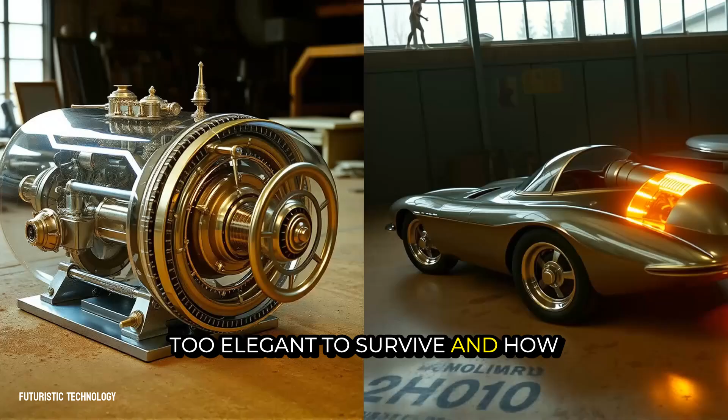We will investigate why a nearly silent engine from the 1800s was too elegant to survive, and how a jet-powered family car from the 1960s became a forgotten dream. This is more than a history lesson. It is a recovery of forgotten futures.

What forgotten idea from the past do you think could change our future the most?

The world we live in runs on a single, dominant idea of power. It is a world of pistons pumping, cylinders firing, and fuel burning in a cycle so universal we rarely stop to question it. But before this single vision solidified, the landscape of mechanical invention was a spectacular chaos of possibility. This was the dawn of difference, a time when what constituted an engine was still up for debate.

Non-traditional propulsion is not just a different way to build a motor, it is a fundamentally different way of seeing energy itself. These are machines that step completely outside the paradigm of the internal combustion engine, rejecting the very principles of pistons and controlled explosions that we take for granted. They are the roads not taken, the answers to questions we have forgotten how to ask.

Consider an engine that has no moving parts at all, humming silently as it turns heat directly into electricity. Picture a device powered by nothing more than the temperature difference between a warm cup of coffee and the cool air of the room. Some even ventured into realms that sound like science fiction, exploring how collapsing bubbles of light or the subtle pressures of empty space could be harnessed for work.

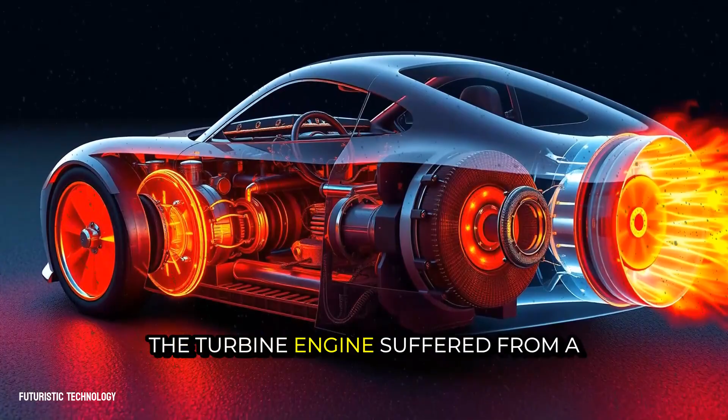But this beautiful dream had concrete problems. The turbine engine suffered from a noticeable throttle lag, a dangerous delay between pressing the accelerator and the car actually surging forward, a major flaw in busy traffic. It was also notoriously thirsty at low speeds and idle, gulping down fuel while sitting at a stoplight.

Its most dramatic flaw, however, was the heat. The exhaust gases shot out at temperatures so incredibly high they were known to discolor and even melt the asphalt on the street behind it.

Chrysler's breathtaking gamble proved that the technology worked, but it also revealed a harsh truth. The gas turbine was a creature of the open highway, born for constant, high-speed flight. It was fundamentally ill-suited to the stop-and-go reality of daily commuting. The future it promised was one of simplicity and smoothness, but it was a future that demanded we change our driving behavior and our entire infrastructure, a price the world was not ready to pay.

This was not a failure of engineering, but a collision between a brilliant machine and the inconvenient realities of human life. That distinct, terrifying buzz was the sound of pure physics weaponized. During the Second World War, the German V-1 flying bomb, or doodlebug, introduced the world to the pulse jet engine, a device of terrifying simplicity.

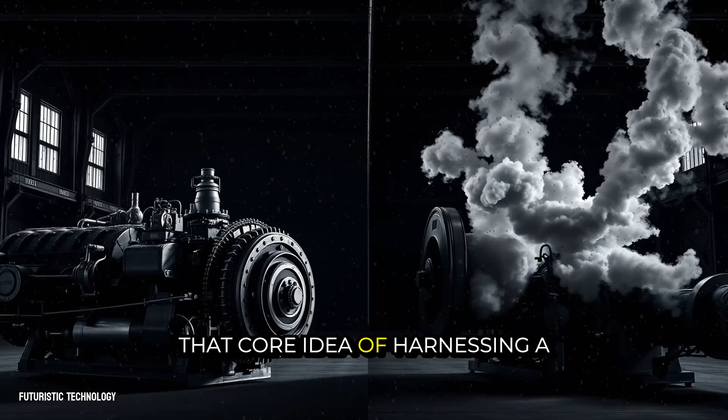But its ghost never left us. That core idea of harnessing a vacuum, of making power from emptiness, echoes through time. It is the same principle that allows a simple drinking straw to function, and it reappears in the most advanced scientific instruments. The atmospheric engine's legacy is a philosophical one, a reminder that sometimes the most powerful force is not what we add, but what we take away.

Fire could become the piston itself. This was the breathtaking promise of the orbital combustion process engine, a design that discarded solid metal parts in favor of a self-contained ring of flame. Picture a donut-shaped cylinder, a continuous circular chamber with no beginning and no end. Instead of a metal slug moving up and down, this engine injected a precise mixture of fuel and air, then ignited it to create a single, rotating fireball. This burning vortex became the piston, a toroidal wave of pressure that spun around the chamber, compressing the fresh charge ahead of it and pushing the exhaust out behind.

It was an engine built from pure energy, a concept that promised to burn fuel so completely and so lean that emissions would plummet and efficiency would soar. By controlling the very propagation of the flame itself, the orbital combustion process aimed to solve the core inefficiencies that had plagued internal combustion for a century.

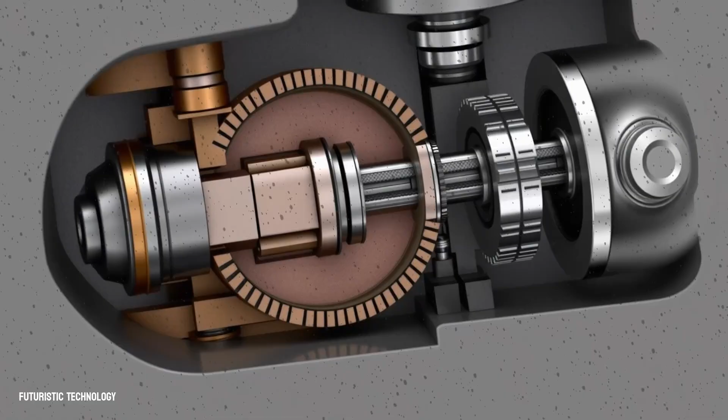This forgotten path represents the ultimate dream of direct energy conversion, a machine that is all heart and no body. It remains a tantalizing vision of pure physics harnessed for work, a silent engine that we could see but never quite hold. That promise of a perfect, vibrationless engine found its most passionate champion in the 1920s.

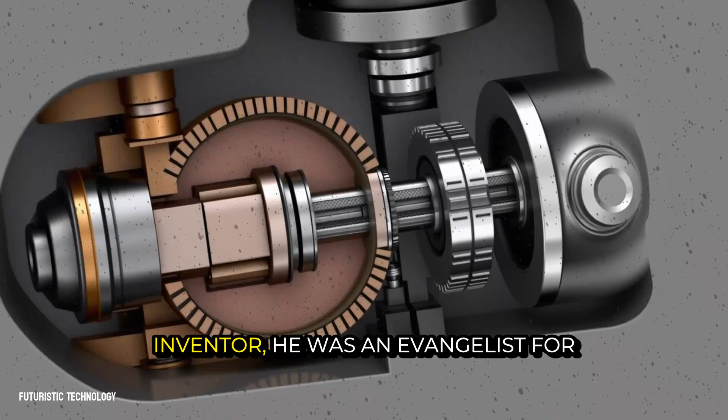Russell Bourke was not just an inventor, he was an evangelist for a mechanical revelation. His engine was a declaration of war against complexity itself. It tore up the conventional engine blueprint and started over with an almost philosophical purity.

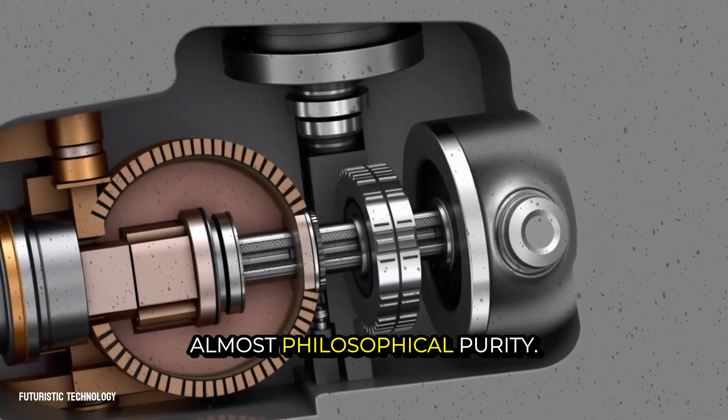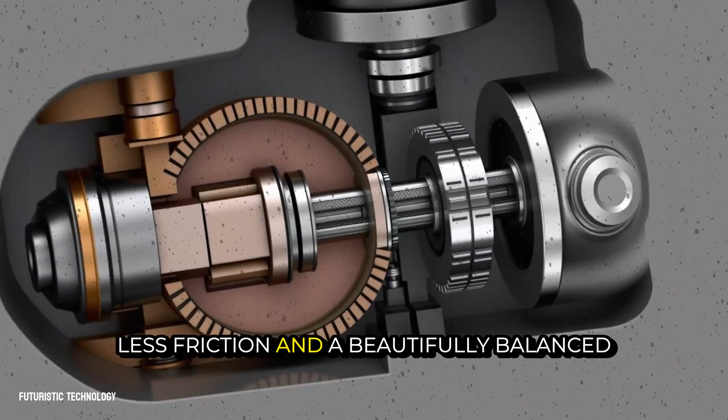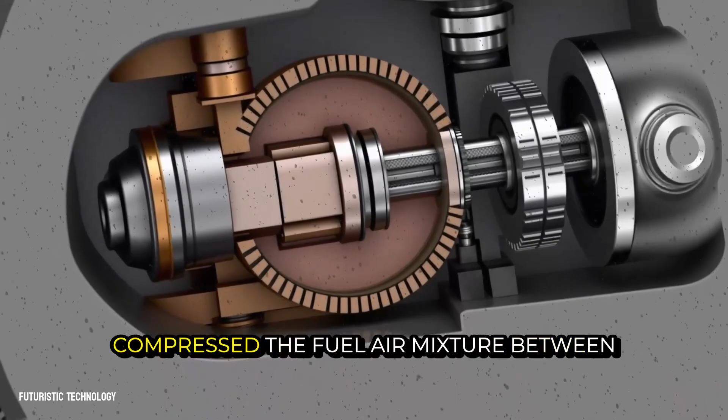At its heart was the Scotch yoke, a mechanism that replaced the familiar connecting rod and crankshaft. This elegant swap converted the piston's linear motion into rotation with far less friction and a beautifully balanced sinusoidal movement. The design used two pistons opposed in a single cylinder, their heads facing each other across a shared combustion chamber. As they moved inward together, they compressed the fuel-air mixture between them. Upon ignition, the explosion forced them apart, their motion captured by the Scotch yoke to spin the crankshaft.

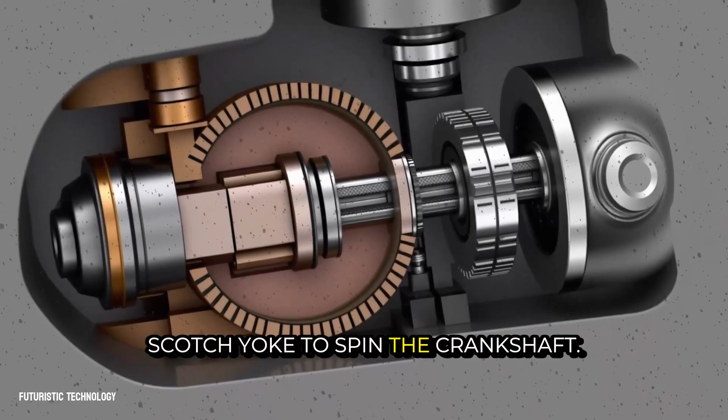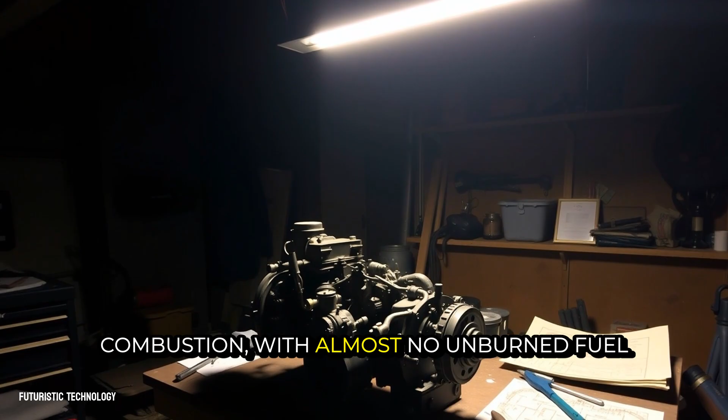This two-stroke, opposed piston design promised a mechanical symphony. Its proponents swore it ran with an otherworldly smoothness, producing virtually no vibration. They claimed its efficient scavenging of exhaust gases led to astoundingly clean combustion, with almost no unburned fuel to pollute the air. Most tantalizing of all was its reported fuel flexibility, able to run happily on gasoline, diesel, kerosene, or even alcohol with minimal adjustment. It sounded less like an engine and more like a mechanical utopia.

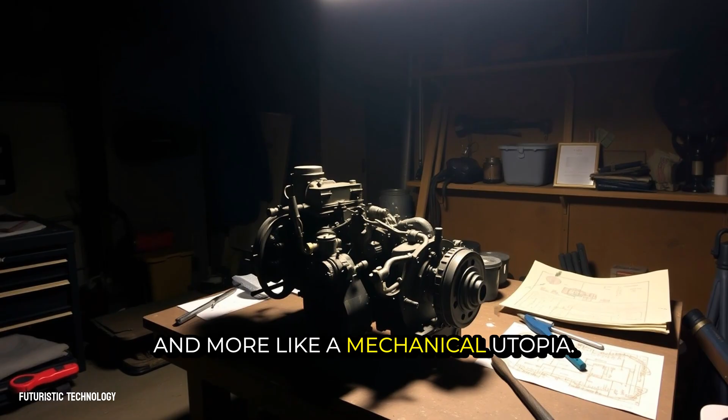So what happened to this miracle? The story immediately plunges into shadow. The secret history of the Bourke engine is a battleground of competing narratives. One persistent legend claims the design was deliberately suppressed. The story goes that major oil and automotive corporations, threatened by an engine that promised incredible fuel economy and could run on virtually anything, acquired the patents only to bury them forever, protecting their lucrative empires. It is a compelling tale of David versus Goliath, of a brilliant outsider crushed by corporate greed.

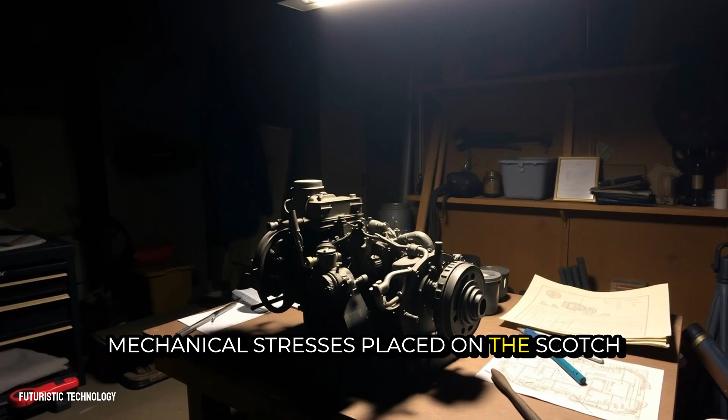Yet another, more sobering analysis points not to conspiracy, but to the engine's own internal demons. Critics and engineers who have studied the design point to the immense mechanical stresses placed on the Scotch yoke components. The very simplicity of the system may have created points of extreme pressure, leading to potential failures under continuous high load. The scavenging process, while elegant in theory, might have been difficult to perfect in practice, leading to inconsistencies.

Was the Bourke engine a flawless masterpiece murdered in its crib? Or was it a beautifully flawed concept that could never quite live up to its own breathtaking promises? The truth is likely lost to time, a murky blend of both.

The Bourke engine survives today not on our roads but as a cult legend. It is a ghost that haunts the garages and workshops of amateur engineers and dreamers who continue to build and test their own versions, chasing that phantom of perfection.

Its story is a cautionary tale about the fine line between visionary genius and impractical obsession. It forces us to ask a difficult question. When a revolutionary idea fails, is it because the world was not ready, or because the idea itself was just a beautiful, unworkable dream? Starlight itself can push a spacecraft.

This is the radical promise of the solar thermal rocket, a design that treats the sun as its only fuel tank. Forget burning chemicals or splitting atoms. This engine runs on pure, concentrated sunlight.

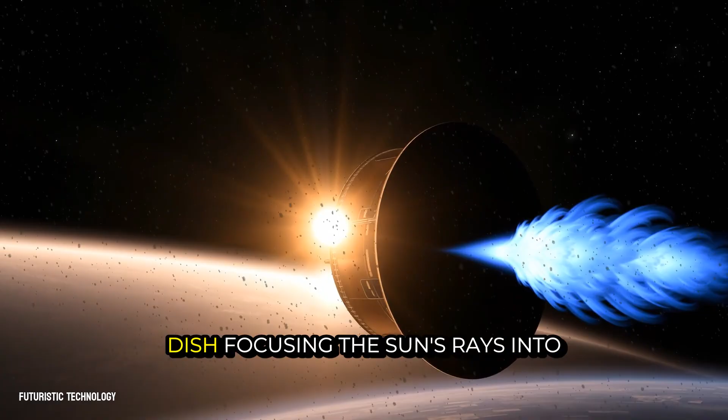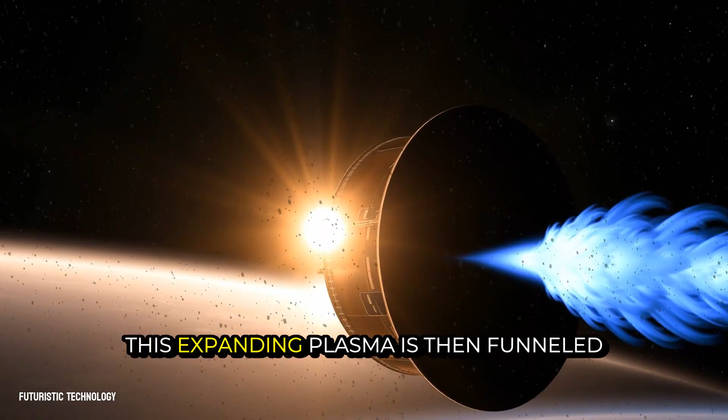Imagine a giant mirror, a parabolic dish focusing the sun's rays into an intense point of heat inside a chamber. Liquid hydrogen, colder than the void of space, is pumped through this solar furnace. In an instant, it is heated not by a flame, but by light, transforming into a superheated gas screaming for release. This expanding plasma is then funneled through a traditional rocket nozzle, creating thrust with an elegant simplicity that chemical rockets cannot match.

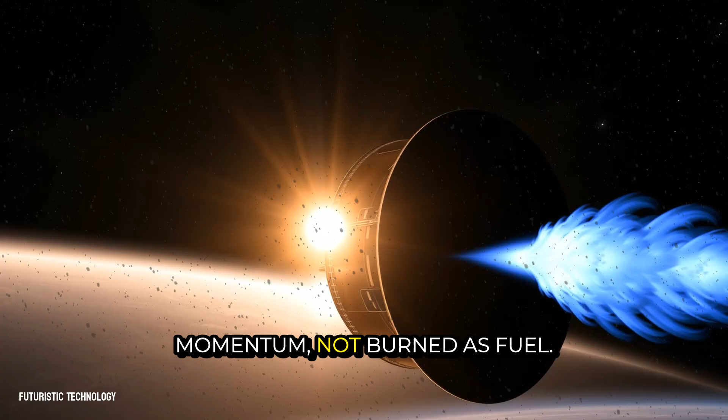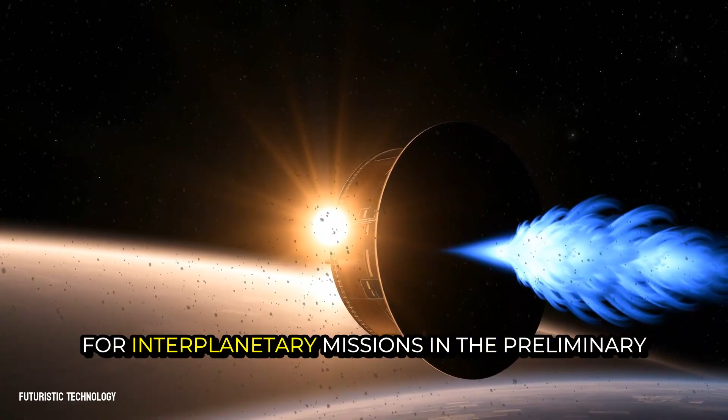The efficiency is staggering because every bit of propellant is used for momentum, not burned as fuel. It is a silent, clean, and potentially endless engine for sailing between worlds. Its blueprints were drawn in the 1970s and 80s, a serious contender for interplanetary missions in the preliminary studies of NASA and other space agencies.

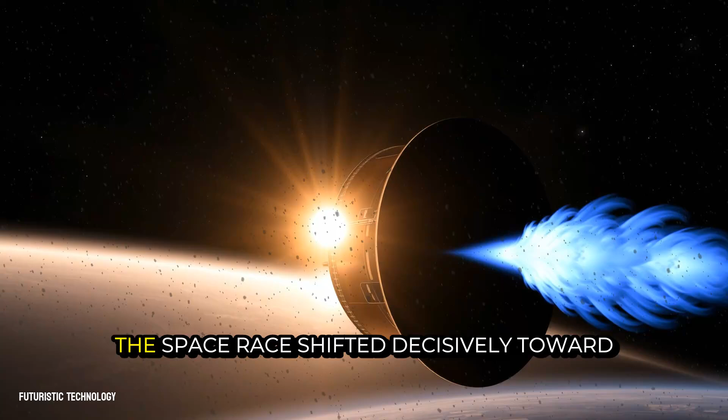It was the logical next step, a sustainable path to the stars, but that future was sidetracked. The political and engineering focus of the space race shifted decisively toward the raw power of chemical rockets and the dense energy of nuclear thermal propulsion.

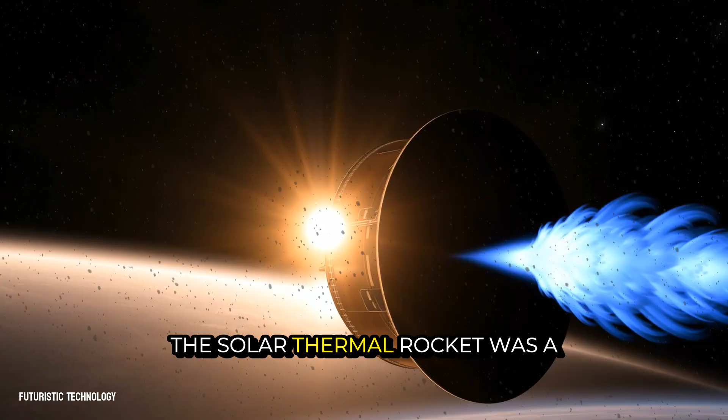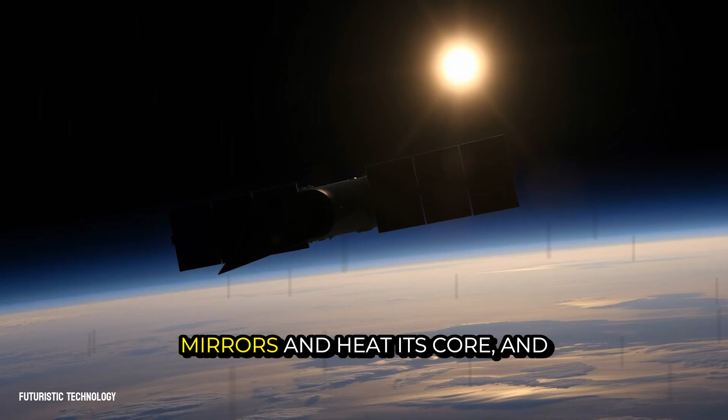The solar thermal rocket was a gentle sailboat in an era that prioritized explosive speed. It was deemed too slow to start, requiring time to position its mirrors and heat its core, and its power was intrinsically linked to its distance from the Sun, weakening as it traveled to the outer planets. So the concept was filed away, a beautiful solution waiting for a problem we had not yet fully embraced.

It stands as a monument to a different kind of space age, one not of explosive force but of patient, intelligent harvesting of the energy that already floods the cosmos. Its day in the sun may yet come, when we finally decide that the best way to explore the heavens is to ride the light that already fills them.

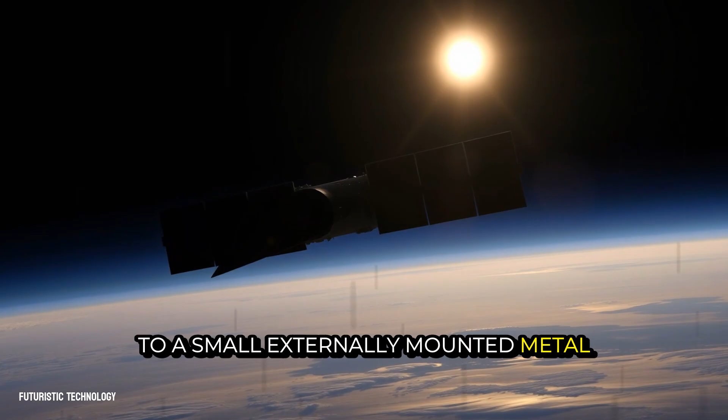Before the roar of the modern diesel engine became the soundtrack of industry, a slower, tougher, and far more forgiving machine held sway. It was the hot bulb engine, a semi-diesel workhorse that demanded patience and rewarded it with unbreakable loyalty. To start one of these giants was a ritual. You would first take a blowtorch to a small, externally mounted metal chamber, the hot bulb itself, heating it until it glowed a cherry red.

Once the bulb was searing hot, you would manually turn the massive flywheel. As the engine lumbered into motion, it would draw a fine spray of fuel oil into the superheated bulb. This fuel would not explode from compression alone, as in a true diesel, but would instead ignite on contact with the scorching metal surface, a process called surface ignition. The engine would chug to life with a slow, heavy, satisfying pop, pop, pop, a sound of immense and deliberate power. This simple ignition method was its genius.

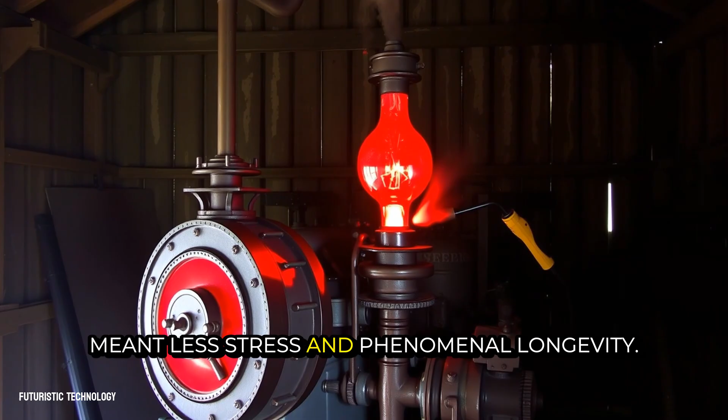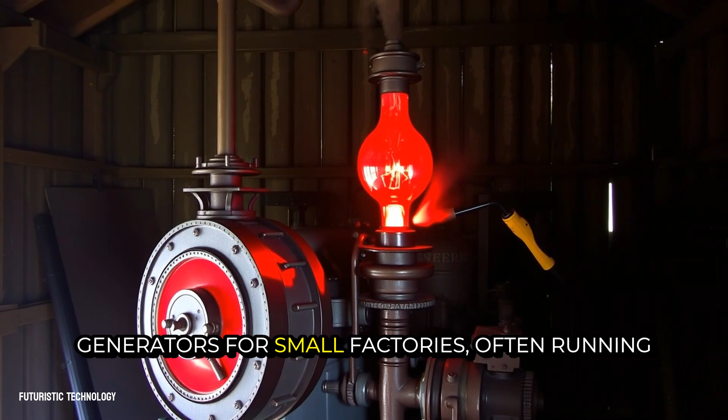It had no complex high-pressure fuel injectors, no precisely machined injection pumps, and no need for the ultra-refined fuels of its more sophisticated descendants. It could run happily on the cheapest, crudest fuel oil, kerosene, vegetable oil, or even used motor oil. Its low-speed operation, often just a few hundred revolutions per minute, meant less stress and phenomenal longevity. These engines became the rugged hearts of fishing boats, the steady power for remote farms, and the reliable generators for small factories, often running for days or even weeks without stopping.

Their downfall was not a lack of strength but a lack of speed. As the 20th century accelerated, the world demanded more power from smaller, faster engines. The true diesel engine, with its high compression and direct fuel injection, was simply more powerful and efficient for its weight. The hot bulb engine, with its necessary warm-up time and leisurely pace, was left behind by progress.

Yet its spirit never truly died. In the most isolated places on Earth, in forgotten lighthouse stations and on small farms in developing nations, these iron titans are still found, chugging away faithfully. They are monuments to an era when an engine was built not for peak performance, but for pure, unkillable endurance.

The brute force approach to efficiency arrived in the 1980s, cloaked in the brittle promise of advanced ceramics. The vision was the Adiabatic diesel, an engine designed to run hot, so incredibly hot that it would need no cooling system at all. Engineers aimed to line the entire combustion chamber with a ceramic armor, an insulating shell meant to trap the inferno of combustion inside the cylinder where it belonged. This was a direct assault on a fundamental inefficiency of every internal combustion engine, the constant, wasteful dumping of heat into the radiator and the atmosphere.

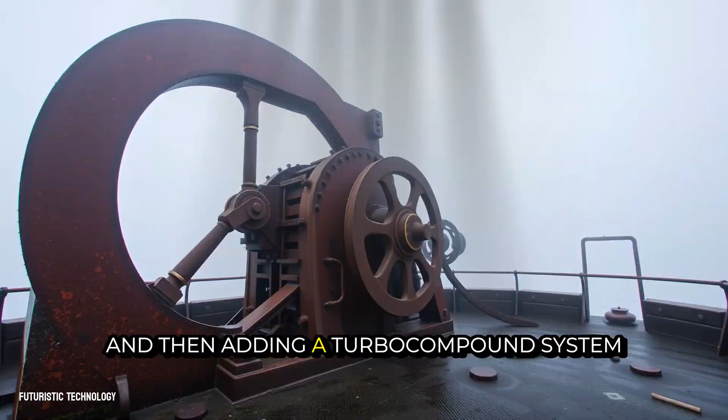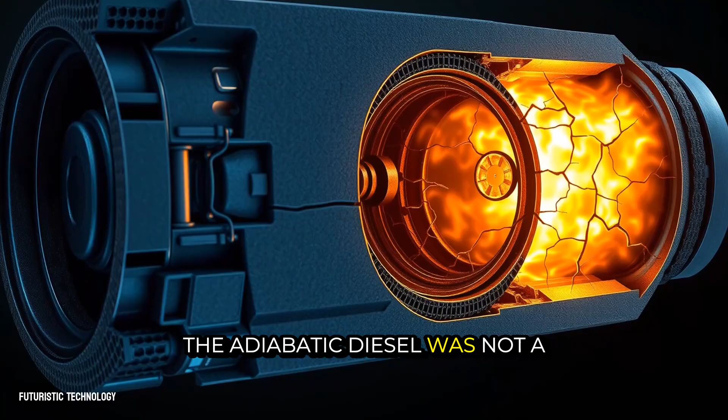By keeping that blistering energy contained, and then adding a turbocompound system to capture even more power from the still scorching exhaust, this engine promised a quantum leap in thermal efficiency. It was a bold attempt to cheat the Carnot limit, a foundational law of thermodynamics that caps the efficiency of any heat engine. The Adiabatic diesel was not a gentle evolution, it was a full-scale rebellion against physics itself.

Yet this rebellion was fought and lost in the microscopic structure of its own armor. The ceramics of that era, for all their technological glamour, were brittle and unforgiving.

They could not survive the relentless, brutal cycle of heating and cooling, the dramatic thermal shock that occurs thousands of times per minute inside a working engine. The constant expansion and contraction created microscopic cracks which quickly grew into catastrophic failures. The ceramic liners would shatter, disintegrating into a fine, abrasive dust that would instantly destroy the engine from the inside out. It was a material science war, and the ceramics simply could not hold the line.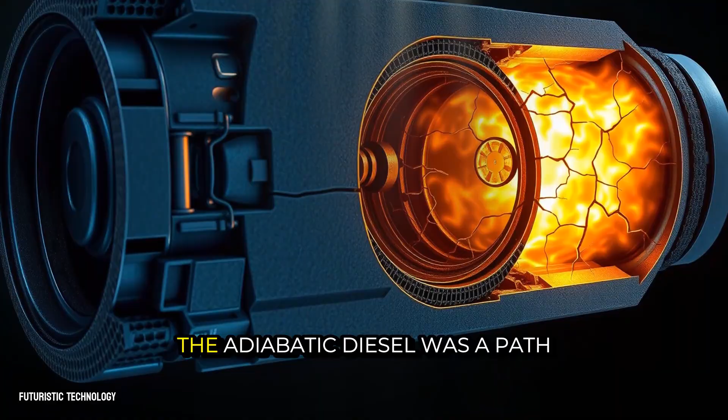This forgotten chapter is a stark lesson in the gap between a beautiful concept on paper and the harsh reality of the physical world. The adiabatic diesel was a path that was conceptually sound, a logical and powerful answer to a fundamental problem, but it was a path that led straight into a technological wall, a dream of perfect efficiency shattered by the very materials needed to build it. It remains a ghost of a future that demanded a substance we had not yet learned to create.

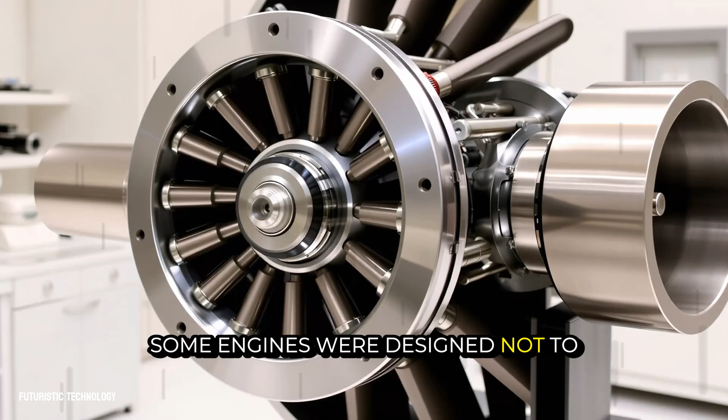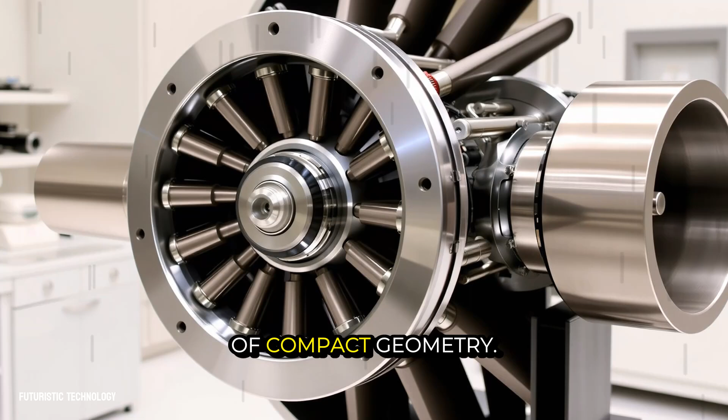Some engines were designed not to be opened, but to be sealed away forever. The axial piston engine, often called the barrel engine, is a masterpiece of compact geometry. Picture a cylinder block not standing tall, but lying on its side, with its pistons arranged in a circle like the chambers of a revolver, all pointing directly at the central output shaft they are meant to spin.

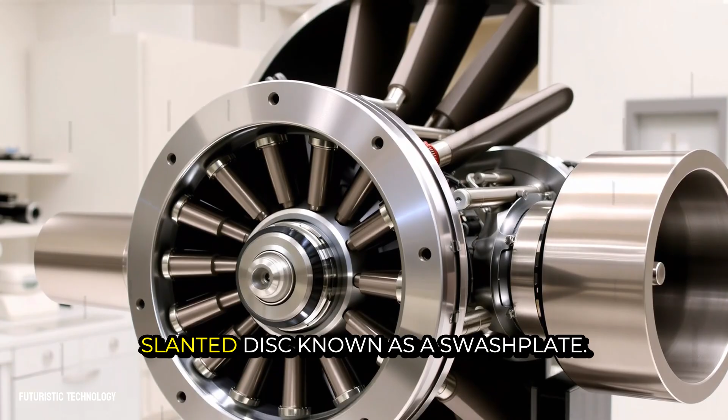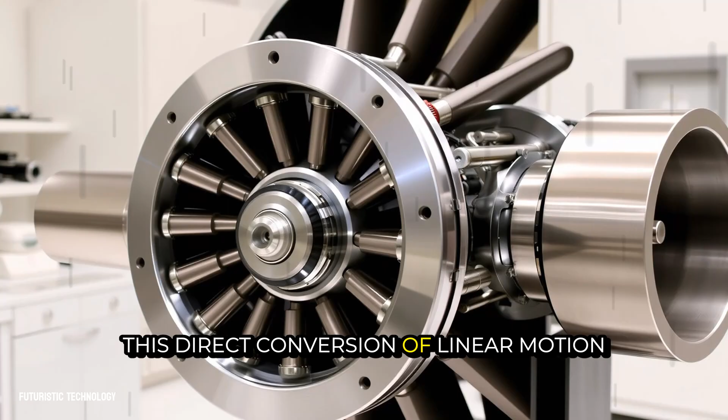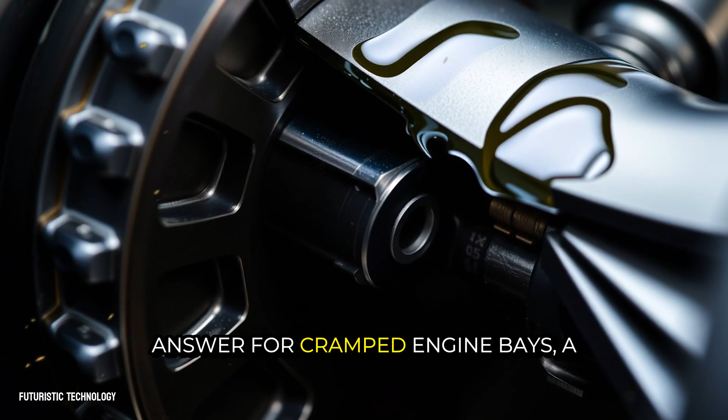This entire cylindrical assembly rotates. The pistons do not push a crankshaft up and down. Instead, they press against a fixed, slanted disc known as a swashplate. As the barrel rotates, each piston follows the angled surface of the swashplate, sliding in and out of its cylinder in a smooth, hypnotic dance. This direct conversion of linear motion into rotation is incredibly efficient and compact, creating a power plant that is remarkably dense for its size. For a brief moment in engineering history, this seemed like the perfect answer for cramped engine bays, a cylindrical package of pure power.

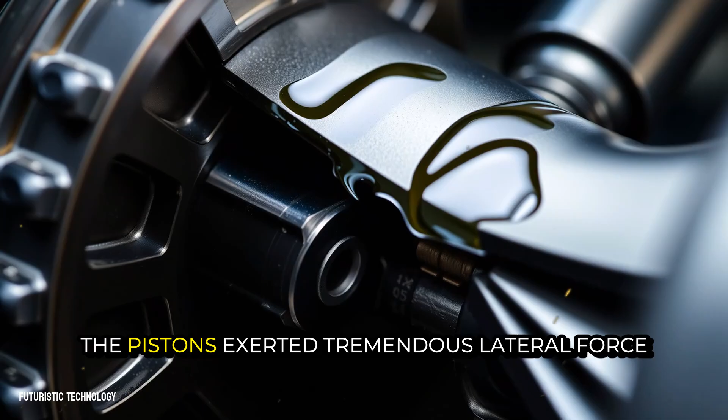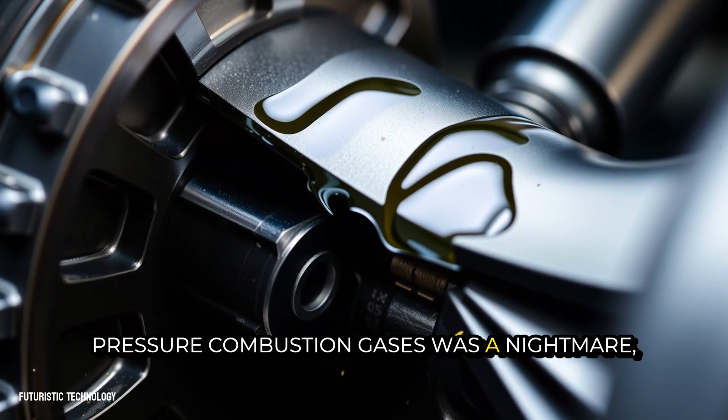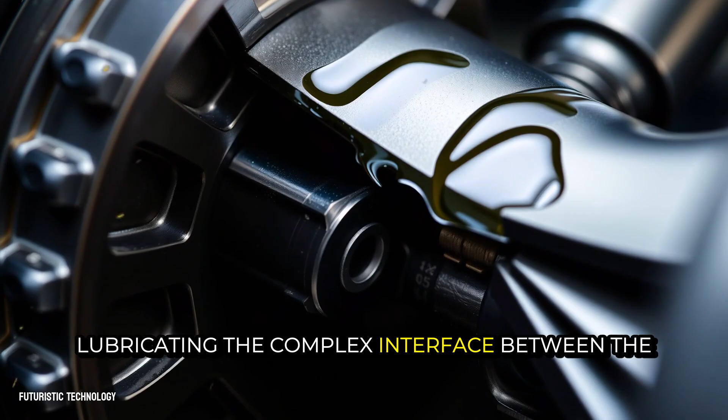So why is this brilliant design not under the hood of your car? The swashplate itself was the source of both its elegance and its downfall. The pistons exerted tremendous lateral force against that angled plate, a constant, grinding pressure that created immense friction and wear. Sealing these rotating cylinders against high-pressure combustion gases was a nightmare, requiring tolerances so fine they were nearly impossible to maintain over thousands of hours. Lubricating the complex interface between the piston shoes and the swashplate demanded a perfect and perpetually clean oil film, a condition the real world of dirt and heat rarely allows.

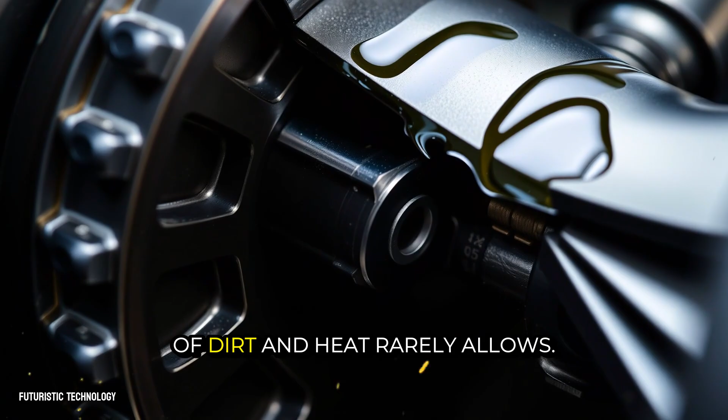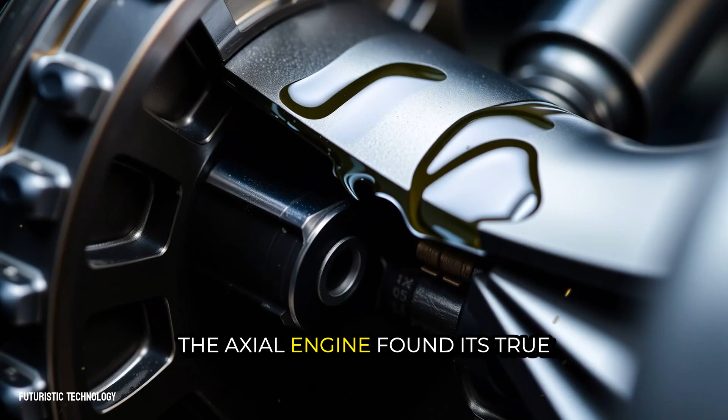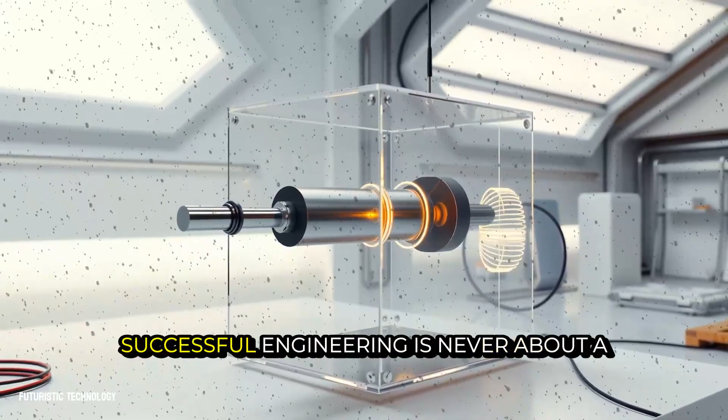This was an engine built for a sterile laboratory, not a dusty back road. Its secret history is not one of failure, but of misapplication. It was an elegant solution that had solved the problem of space, but in doing so, it had created new, more insidious problems of physics and maintenance. The axial engine found its true calling not in the chaotic world of automotive travel, but in the sealed, hydraulic systems of heavy machinery and aircraft, where it could function as a pump or motor in a clean, controlled fluid environment. It serves as a profound reminder that a brilliant design in one context can be a flawed compromise in another, and that the most successful engineering is never about a single perfect idea, but about the careful, practical balance of them all.

Cut the crankshaft and you liberate the piston. This is the radical premise of the free piston engine, a design that first emerged in the 1920s. Without a crankshaft to dictate its stroke, the piston assembly is set free, oscillating back and forth between two combustion chambers like a perpetual pendulum of pure force. For decades, this was a tantalizing but unruly concept, a mechanical bronco that was nearly impossible to tame.

But today, this old idea has found its perfect partner in modern electronics, resurrecting as the free piston linear generator. In this modern incarnation, the pistons are directly attached to powerful magnets. As they fly back and forth, these magnets travel through a series of coiled wires, inducing an electrical current with every single stroke. The combustion itself directly and instantly creates electricity.

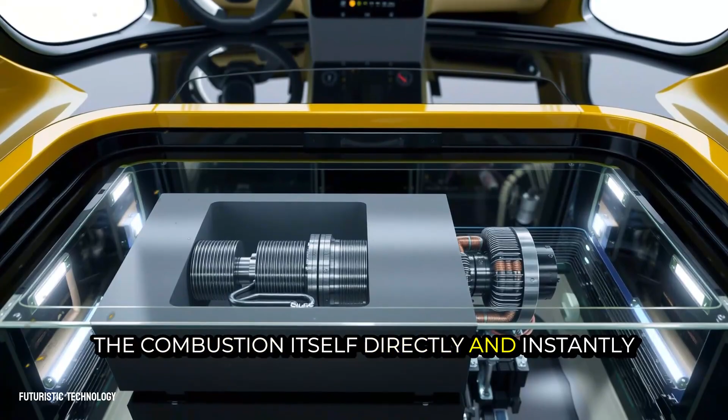This decoupling from rotating parts unlocks extraordinary advantages. The engine can achieve variable compression, finely tuning the squeeze in the cylinder for whatever fuel is available, from gasoline to natural gas or hydrogen. This multi-fuel flexibility is inherent to its design.

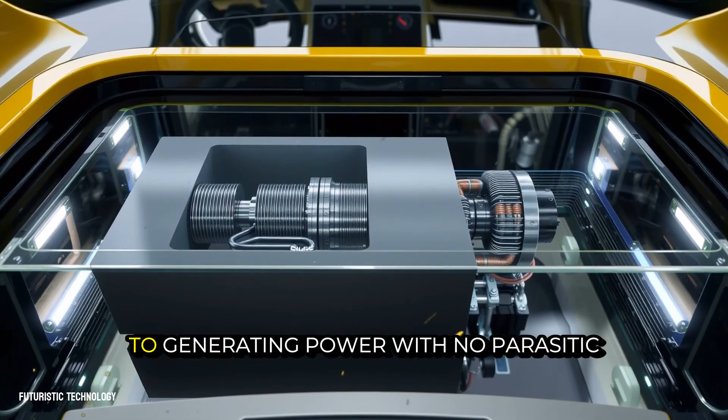The potential for efficiency is staggering, as every motion is dedicated solely to generating power, with no parasitic losses to a crankshaft or transmission. The secret history of this engine is not one of a single failure, but of a recurring phantom. Every 20 or 30 years, a new generation of engineers, armed with better materials and smarter digital controllers, rediscovers the free piston's promise.

They solve the control problems that stumped their predecessors, only for the technology to once again recede into the background, waiting for the next technological leap.

It represents the ultimate modular power unit. Imagine a compact, whisper-quiet box under the floor of your electric car, acting not as the primary motor, but as a range-extending generator that efficiently creates electricity on demand. Or picture one installed in your basement, powering your home with a flexibility and efficiency that our current grid-bound systems cannot match. This is not just an engine, it is a power plant in a box, a ghost from the past that keeps returning with the answer to a future we are only now beginning to build.

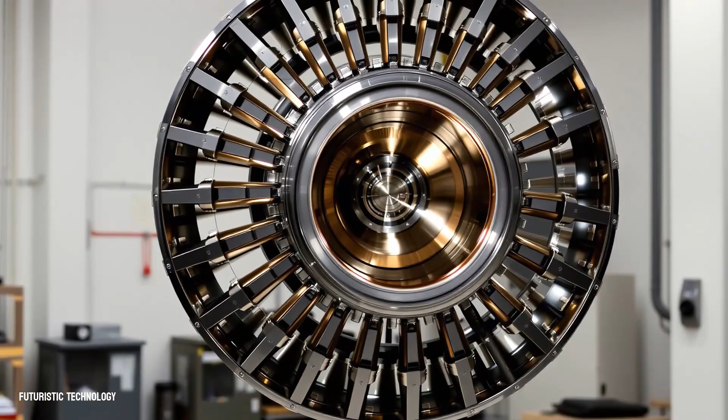But this beauty came at a cost that proved too high. The spherical engine was a nightmare to manufacture. Machining a perfectly spherical central chamber and ensuring the precise alignment of all the radially mounted cylinders required a level of craftsmanship and tolerance that was prohibitively expensive. Every single seal and joint was a unique, complex curve, defying the straightforward, linear production lines that were beginning to dominate industry.

It was a masterpiece of aesthetic engineering, a proof that an engine could be a thing of profound geometric harmony. Yet its legacy is that of a brilliant prototype, a stunning demonstration of what was possible when engineers dared to dream in 3 dimensions, even if the world was not yet ready to build their vision.

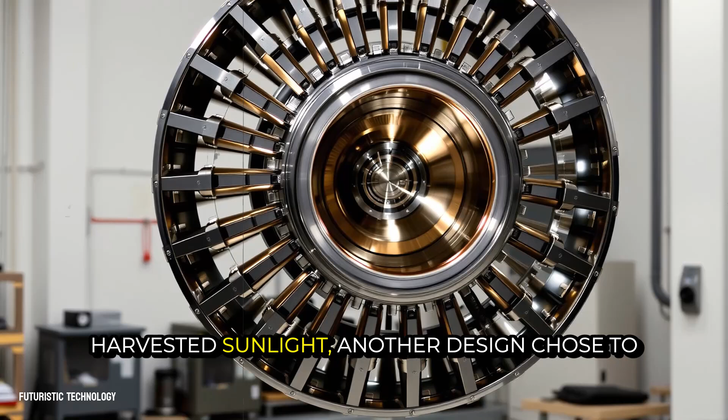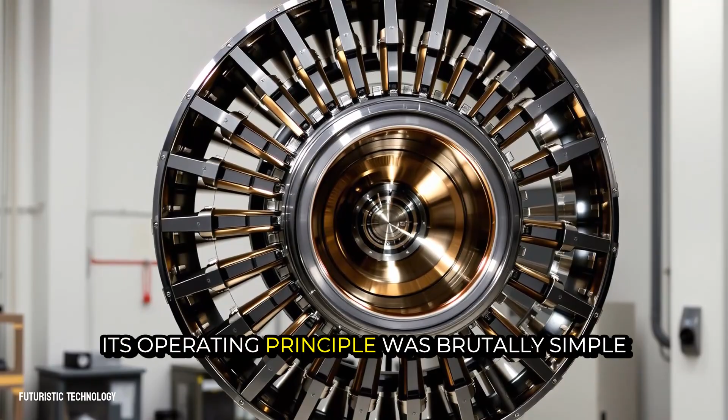While the solar thermal rocket gently harvested sunlight, another design chose to unleash the very heart of a star. This was the nuclear thermal rocket, and for 2 decades it was not a concept, but a concrete program known as Project Rover. Its operating principle was brutally simple and devastatingly powerful.

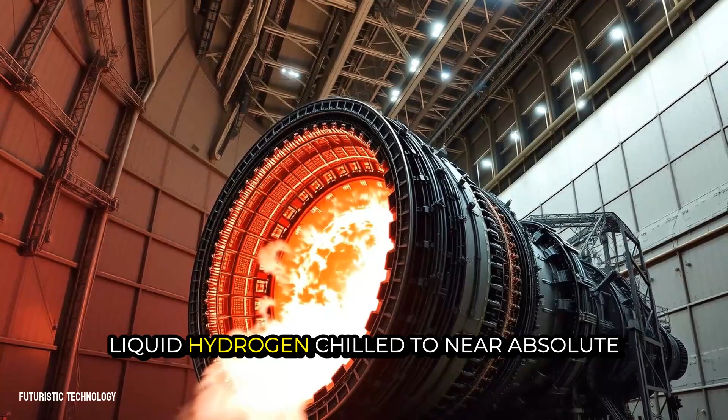At its core was a compact nuclear fission reactor, but instead of generating electricity, its only job was to become white-hot. Liquid hydrogen, chilled to near absolute zero, was pumped directly through the reactor's blazing core. In a fraction of a second, this supercold propellant was flash-heated into a screaming, expanding plasma, then blasted out of a traditional rocket nozzle. The efficiency was not just an improvement, it was a revolution.

By using the reactor purely as a furnace and not carrying its own oxidizer, a nuclear thermal rocket could achieve nearly double the thrust efficiency, or specific impulse, of the best chemical engines. This single advancement meant that a mission to Mars could see its travel time slashed in half, turning a years-long, perilous journey into a voyage of mere months.

The engines were real, they were built and they were tested, roaring to life in remote desert facilities, proving that the power for rapid interplanetary travel was already within our grasp. So why are we not using them today?

The answer lies not in engineering, but in earthly anxieties. As the Cold War waned, public and political appetite for launching nuclear reactors into space evaporated. The very word nuclear became associated with catastrophe and fallout, a fear that overshadowed the meticulous safety protocols and the sheer potential of the technology. The immense cost of the program was harder to justify in a new political climate, and the vision of a nuclear-powered fleet to the planets was quietly shelved.

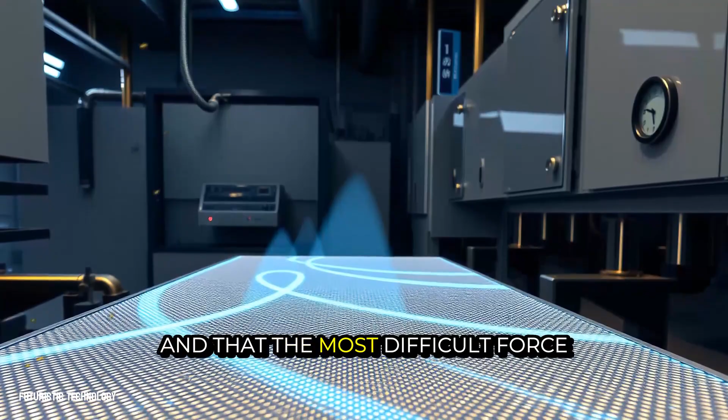They serve as a crucial reminder that the laws of physics are a harsh but utterly impartial judge, and that the most difficult force to overcome in any experiment is not gravity or friction, but the overwhelming power of our own hopes. Fire could burn without heat.

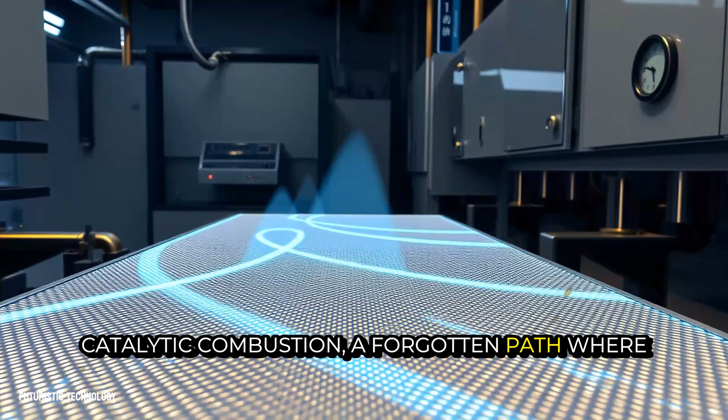This was the strange promise of catalytic combustion, a forgotten path where engines would work not with a roar, but with a quiet chemical sigh. Imagine a metal surface, a catalyst, that could coax fuel and air into combining at temperatures barely above room temperature. There would be no brilliant flame, no searing blast of heat, just a gentle, immediate release of energy. This cool combustion was the ultimate engineering dream.

It promised to completely eliminate nitrogen oxide pollutants, which are only born in the fierce heat of a traditional fire. It would also conquer thermal loss, that great thief of efficiency, because the engine itself would never get hot enough to waste energy radiating into its surroundings. The exhaust from such a machine might even be clean enough to breathe.

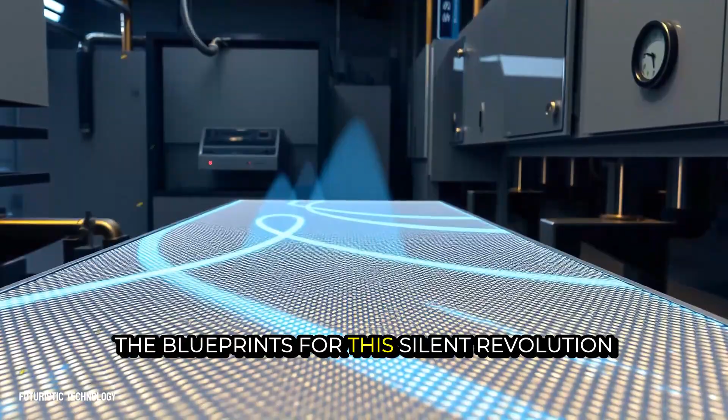Visions emerged of whisper-quiet generators for homes and libraries, or car engines that produced little more than warm water vapor and carbon dioxide. The blueprints for this silent revolution are not in secret vaults, but scattered and forgotten in academic journals and obscure patents from decades past, a field of research that simply faded away.

The core problem was one of delicate control. A catalyst is a finicky artist. Trace impurities in the fuel, like sulfur, would permanently poison its active sites, coating the surface in a layer that rendered it useless. Even with a perfect fuel, the reaction rates were often too slow to produce the rapid power pulses an engine needs, and starting the process was one thing, stopping it was another.

How do you precisely throttle a chemical reaction that wants to spread across a vast surface area all at once? It was like trying to control a phantom, a reaction that was either too lazy to begin or, once started, impossible to contain without quenching it entirely. This ghost of an engine remains one of the most elegant what-ifs, a future where the very idea of combustion was transformed from a violent explosion into a gentle, controlled handshake between molecules.

The quietest engine of all might be one that harnesses a river's gentle farewell to the land. Where fresh water flows into the sea, a tremendous, invisible force is born from the simple difference in saltiness. An osmotic engine taps directly into this natural tension, a machine that treats the meeting of two waters as its fuel. It works by exploiting a fundamental desperation of nature, the drive toward equilibrium.

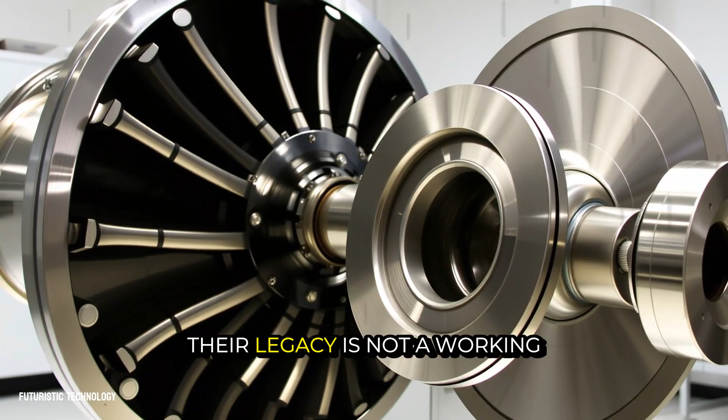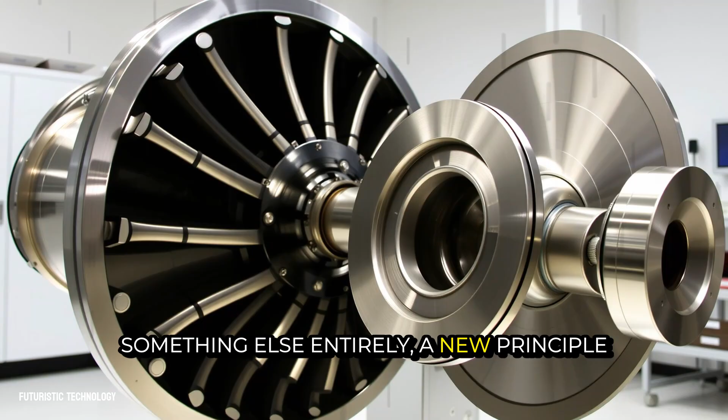So why do we still remember these failures? They represent an undying human curiosity, a drive to challenge the impossible even when the laws of physics stand like an unbreakable wall. They are the ghosts at the feast of engineering progress, a constant, humbling reminder of the line between visionary ambition and futile obsession. Their legacy is not a working machine, but a philosophical question: how far should we push against the immutable rules of reality? And in that endless pushing, even in failure, do we sometimes discover something else entirely, a new principle or a deeper understanding we would have otherwise missed?